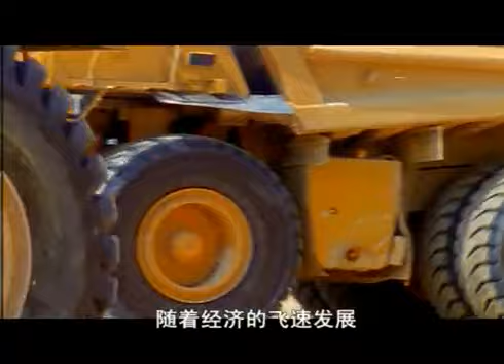With a booming economy, China has an unprecedented number of construction projects on the go. With this Olympic makeover, Chinese authorities plan even more: a new national theater, the Egg; a new stadium, the Bird's Nest; and a giant Olympic swimming pool, the Water Cube.

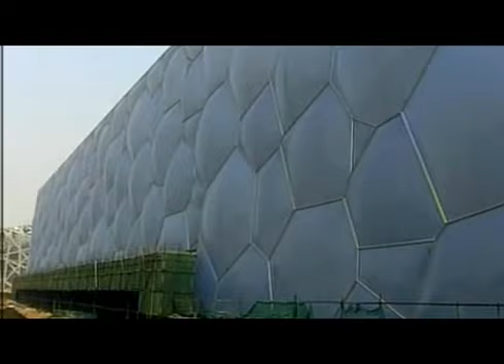They're using these buildings of such enormous size and such groundbreaking technology to show that they are one of the leaders in the world. With passenger numbers set to soar to a whopping 60 million a year by 2015...

Beijing's aging airport will struggle to cope. There is only one solution: they must build the world's biggest airport terminal. Nothing on this scale has ever been undertaken in the history of our species. It's the biggest thing on the planet.

Today, Beijing's new Terminal 3 is fast approaching completion. In under 4 years, they're close to achieving the unthinkable.

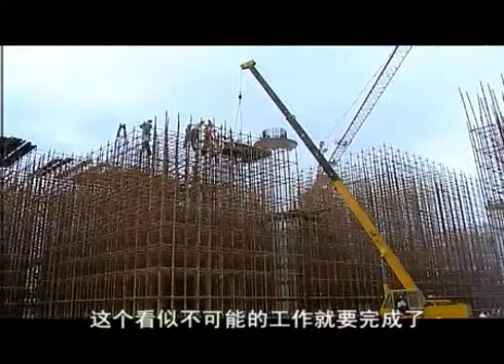The Chinese call it the Dragon. Its astonishing roof mimics the scales of the beast, and is so large you can't see from one end to the other. With giant walls of glass, it has the longest cantilever entrance in the world. And in the belly of the Dragon, one of the largest baggage systems ever built.

But Terminal 3 captures the glory of China's past as well as its future. The roof of gold and red evokes the colors of ancient Chinese palaces. It's a connection to China's past that's important to the architects. The reds, the very intense red, the very Chinese red, the gradations through to gold, the patterns, the shape of the building from above - they're all very evocative of the place.

Throughout history, China has been at the forefront of human endeavor. In ancient times, emperors built gigantic palaces, like the Forbidden City, and engineering wonders, like the Great Wall. These structures pushed the technology of the day to the limit. But a new age is dawning on China as they create a high-tech 21st century metropolis.

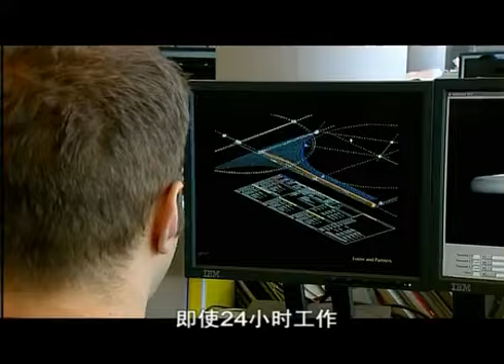Even with commitment like this, there's no guarantee they'll be able to meet the Olympic deadline. You can commit 100%, but in any building venture, there are so many things that can happen during the life of that construction period. You can have storms, tempests, earthquakes.

Foster is right to be concerned by earthquakes. Terminal 3 lies within a major seismic region. Throughout history, quakes have struck this area, causing destruction. Earthquake expert Professor Ke knows the risks they face: it lies in a seismic intensity 8 zone. It's very strong, so earthquake-resistant construction is essential in our buildings. In the past, they were not fully equipped to deal with mega earthquakes, with disastrous consequences.

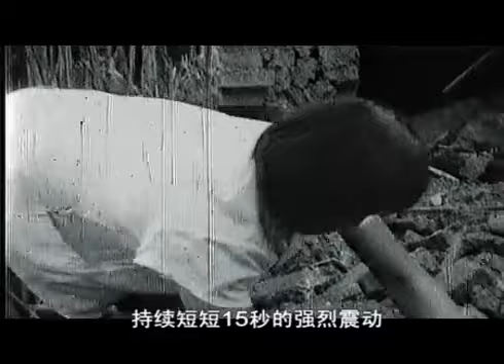Tangshan, July 28, 1976. A quake strikes the city, registering a staggering 7.8 on the Richter scale. Lasting just 15 seconds, this quake levels most of the densely populated city, killing hundreds of thousands of people.

The Tangshan earthquake in 1976 was an important wake-up call to structural engineers and earthquake researchers across the country. In the months ahead, engineers must convince the authorities that this enormous structure can be made quake-proof.

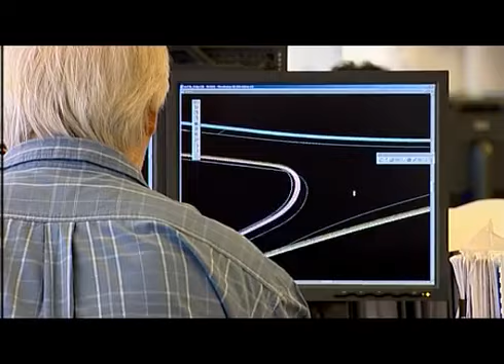Terminal 3 will be an incredible 60% bigger than Hong Kong's Chek Lap Kok, yet they'll have 2 years less construction time. And giant construction projects can lead to giant problems. Building the foundations to this immense structure will be an almighty challenge. Nobody knows whether it can be done, but national pride and Olympic glory is at stake.

Foster and Partners have won the opportunity to build the biggest airport terminal in the world. Architect Mouzhan Majidi knows it's an awesome undertaking. This is perhaps one of the biggest projects any architect has ever taken on board.

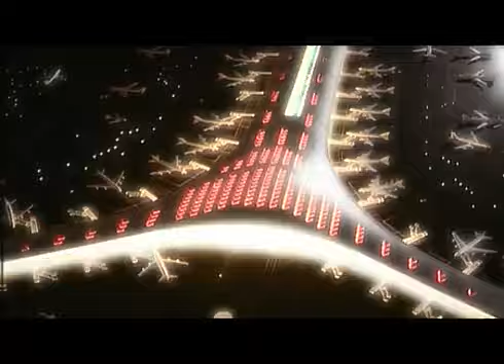Terminal 3 must hold a staggering 150 aircraft at any one time, 120 more than Beijing's existing 2 airport terminals combined. The scale here is colossal. This is the biggest building on the planet. It's a startling design, but an immense challenge to turn it into a reality.

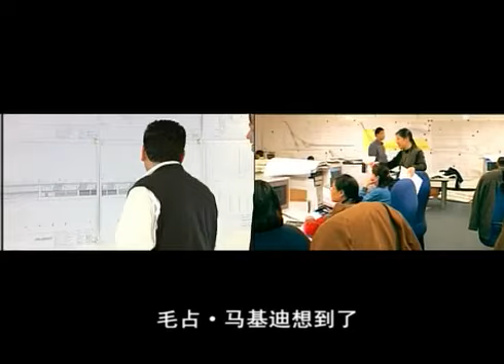They'll need the best engineers they can find. Mouzhan Majidi turns to long-standing construction partners, Arup. Martin Manning is assigned as their project engineer. He's got overall responsibility for drawing up a construction plan.

In the early stages, there was a great deal of panic because of the program. But as the team got going, there was just generalized hysteria about the amount of work that had to be done.

Manning meets with the Chinese clients to present his schedule. He hopes to start the build in September 2004. The Olympic Games open in only 4 years, and time will be tight.

But then their Chinese bosses announce they want to start construction 6 months earlier. Manning is staggered. When it became absolutely obvious that the deadline was not going to move, your mind gets concentrated pretty clearly about the decisions that you have to take.

Manning's right-hand man, Joe Sumners, has no idea how they'll get the work done on time. But then the phone started to ring, and these renowned engineers from around the organisation were sort of picking up the phone and saying, 'I hear you've got a project, it's an impossible delivery time, the engineering's ridiculous, you're bound to fail, can I join you?'

Construction must start in March 2004, so Sumners and Manning hope to find the site ready and prepared for construction crews to move in. They're in for a big surprise.

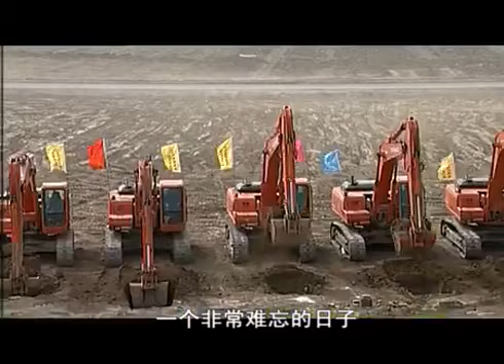They've reached the first major milestone, but a long road still lies ahead. A workforce of 50,000 springs into action. It was like a scene out of movies. It was like building the pyramids, you know, an incredible sight.

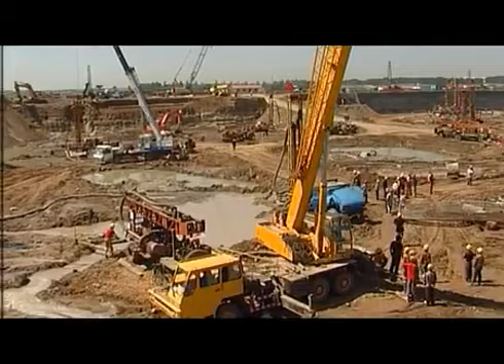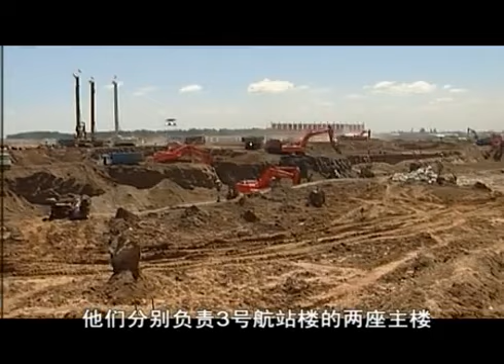Now the construction plans are drawn up, they'll hand over to Chinese firms for the actual build. T3 is so large that it'll take 2 of China's largest construction firms to do the job. They'll each build one of T3's massive concourses, T3A and T3B.

Mr. Bai leads the army of workers at the north side of the site and will take on the enormous responsibility of the construction of T3B. 'Anything that goes wrong will make us Beijing people, our construction workers, even we Chinese, lose faith. So I do feel a great sense of responsibility.'

At the other end of Terminal 3, Mr. Zhang is in charge of T3A. 'It is almost unimaginable to complete a project of this scale within 4 years. However, the task is right here in front of you. There's no way through except to do it well.'

By April 2004, over 100 excavators arrive on site.

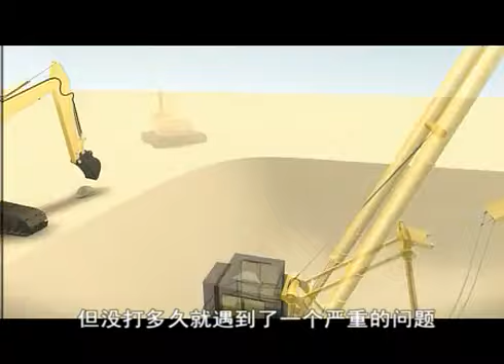217 pile drivers start knocking 20,000 steel piles into the ground. But they've not drilled far before they encounter a serious problem: the water table here is close to the surface, and it can rise even further with heavy rains. The teams need specialist expert advice. One man should be able to help.

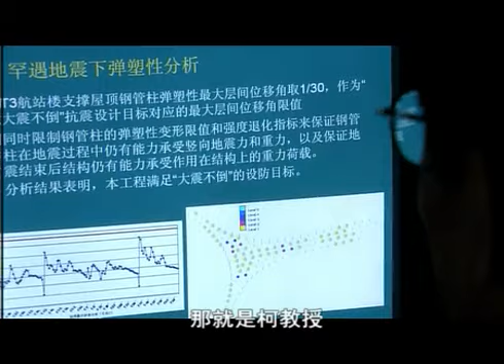Professor Ke is an expert on the ground conditions in Beijing. There are two kinds of piles: one is a pressure-resistant pile, and the other is an uplift pile to prevent the structure from floating due to the high level of underground water. We cannot let the building go afloat when the waters rise.

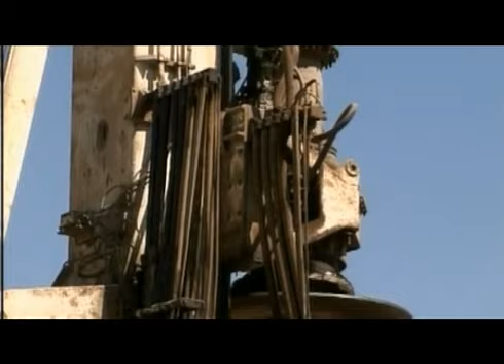The piles also help protect the building from the risk of earthquake damage. When an earthquake wave strikes, it takes some time to travel from the south side to the north side of the building, so we adopted a different design from conventional buildings. Professor Ke's first concern is to ensure that the joints of these long buildings can stand up to one of nature's deadliest forces. The joints are seen as more important than building components.

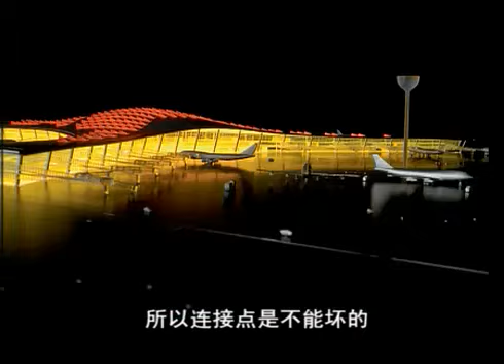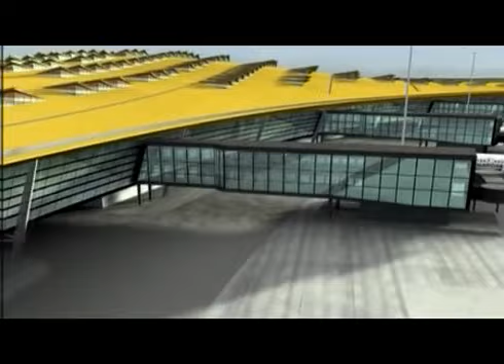Joints must be unbreakable. Ke knows the joints will come under the greatest strain in the corners of the building if an earthquake strikes. The corner of the building is affected the most by earthquake waves. This will cause torsion of the building. Torsion or twisting forces can pose a big challenge to engineers.

November 7th, 1940, and the Tacoma Narrows Bridge in the United States starts twisting in the wind. Within minutes, the bridge shakes itself to bits.

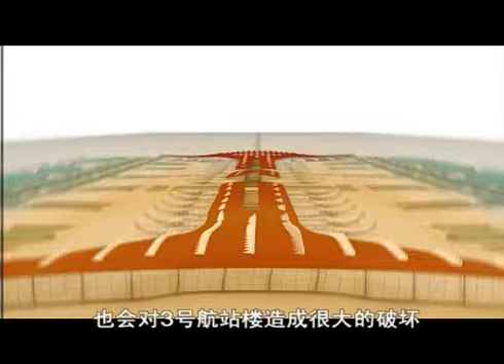No human life was lost in this disaster, but similar torsion forces could impact T3 in a quake scenario. If the two ends of the building vibrate in opposite directions, the building could collapse, and the death toll could be enormous. T3 will need over 1,000 special joints, absorbing the impact should the roof and walls contort. But this will not be enough.

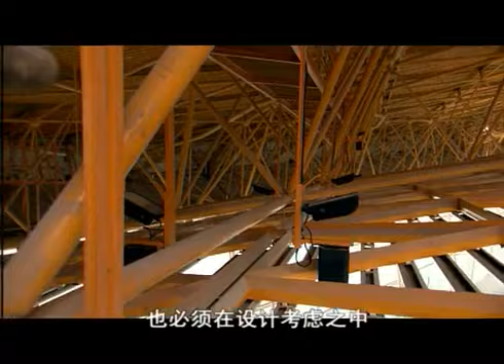Martin Manning knows the steel beams, or members, must also be designed with safety in mind. What we had to do was to choose the sizes of the members so that they were strong enough to resist the forces that were induced within them. After 4 months, the design is finished. Manning is now confident that this building will stand firm.

Yet earthquakes aren't the only force of nature that T3 must endure. The variation in temperature throughout the year is very great indeed. It gets very hot and it gets very cold, so on an annual cycle, the movements are quite large. When this super terminal heats up and cools down, it will grow and shrink by up to 80 centimeters.

In fact, the movements are large enough to have a serious impact on the roof's supporting columns. The thermal movements of the roof are such that as the roof expands, it would have moved those columns too far, it would have bent the columns. If the roof and columns do bend out of shape, it'll be a major disaster for the engineering team.

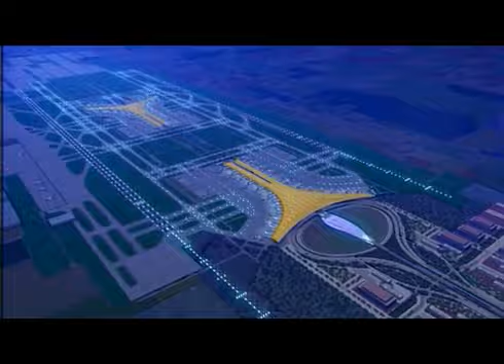Beijing's new airport terminal will have an enormous roof, spanning almost a kilometer at its widest point. Its dragon-like scales will silhouette against the sky, making it instantly recognizable. It's a symbol that's important to Terminal 3 Vice Commander Madame Zhu. When Foster presented the design that symbolized a dragon, we thought it was logical, since China has the culture of the dragon.

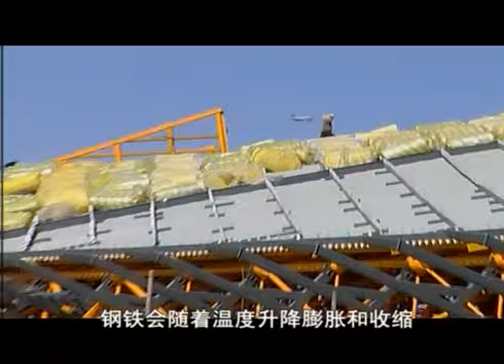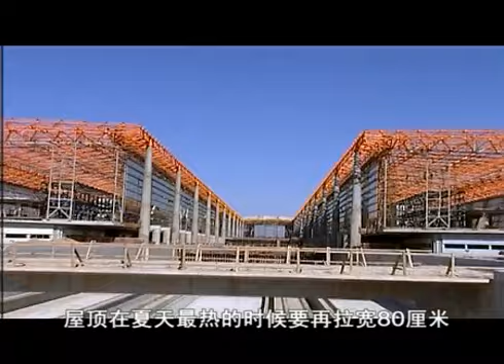It's an awe-inspiring design, but its sheer size could put the structure in serious danger. Steel expands and contracts as it heats up and cools down. In peak summer heat, this roof will grow by up to 80 centimeters at its widest point. Usually, this problem could be solved by building a roof in separate sections. At T3, this is simply not feasible. The roof is a single span and is far too big.

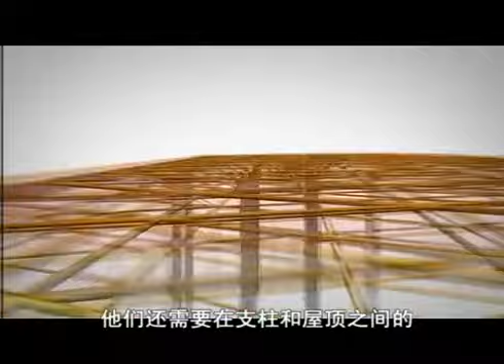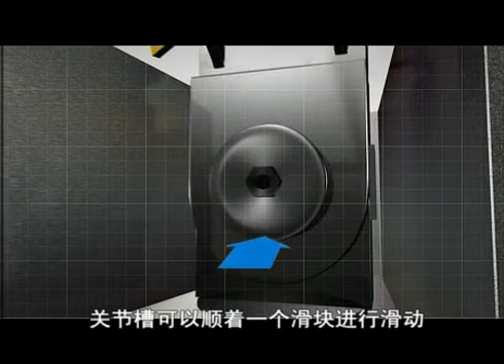Instead, engineers must come up with a clever solution. We adopted many complicated and intricate methods, for instance, loosening and tightening the joints at different spots to relieve or minimize the pressure caused by temperature. But tweaking the regular joints isn't enough. They'll need 32 thermal expansion joints positioned between the columns and the roof at key points. As the steel roof expands, the joint glides along a sliding mechanism. The roof can grow and shrink without causing destruction.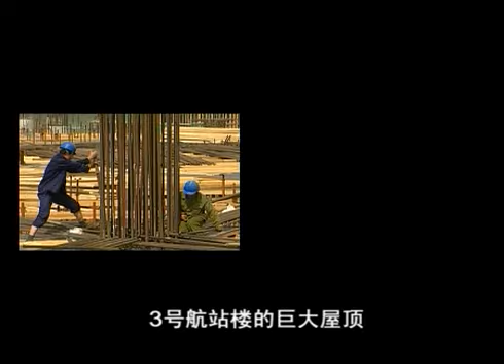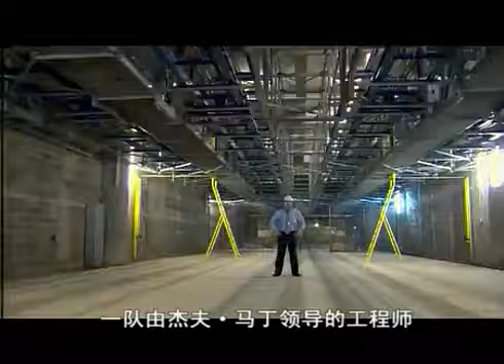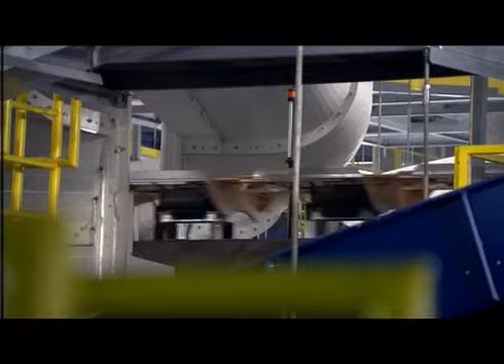Terminal 3's gigantic roof may be safe from buckling in the heat, but it's not long before T3's enormous size causes another headache, this time for the baggage engineers. The system here at Beijing Airport is certainly one of the biggest in the world from a baggage handling system perspective. Baggage system experts fly in from German engineering firm Siemens. Led by engineer Jeff Martin, they begin to plan a $250 million state-of-the-art baggage system. It's expected to handle an awesome 19,200 pieces of luggage per hour. 68 kilometers of conveyor belt will hurtle baggage around the airport.

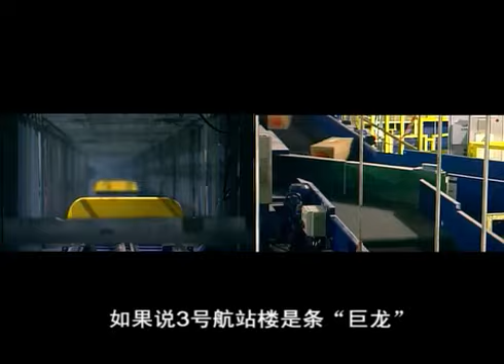If Terminal 3 is to be known as the Dragon, this system will be its lifeblood. The baggage handling system is the veins and arteries of the Dragon. Getting this giant system to fit inside the terminal's basement is like completing a giant jigsaw puzzle.

There doesn't seem to be enough room within Foster's design for such a big system. It causes tension between architects and engineers. At some stage, the whole team has to decide whether they're designing a system to distribute bags or whether they're designing an airport terminal.

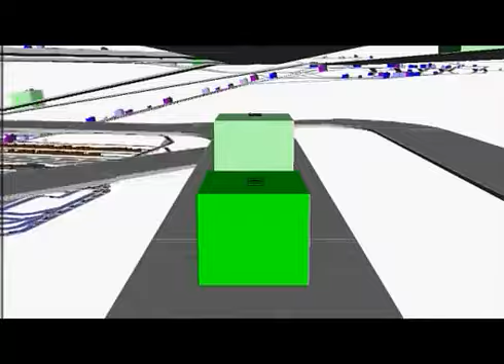Then Jeff Martin and his team hit upon a double-decker system, doubling overall capacity at a stroke. But this will create a new problem. They need more ceiling space.

The original Foster design was designed for a standard airport baggage system. And with the new designs and the new technology required, we had to drop the basement approximately an additional 5 meters. It will cost not just money, but time. And they must still meet the tight deadline.

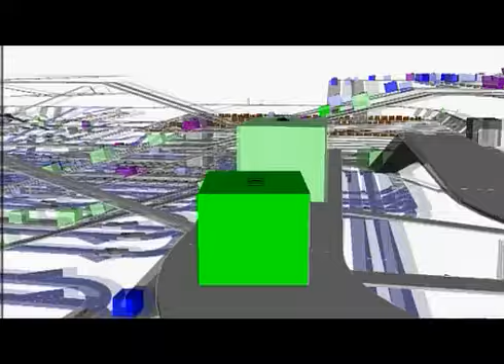Normally a project this size is anywhere from 3 to 4 years in duration. Unfortunately, because of the Olympics, we didn't have that amount of time. We basically had 2.5 years.

The only way to deliver on schedule will be to begin construction of the baggage system whilst the terminal is still underway. As Jeff Martin leads construction, system design changes are still filtering down.

We didn't have time to do it twice. We had time to do it once, and time to do it right the one time. The person doing the design change is sitting at the computer doing the change. Oh, that's easy, no problem. But realistically, when you actually have to install that into the system, there's a lot of things that can go wrong with that design change.

Jeff and his engineers must rise to the challenge. Despite the painful last-minute design changes, they somehow remain on schedule.

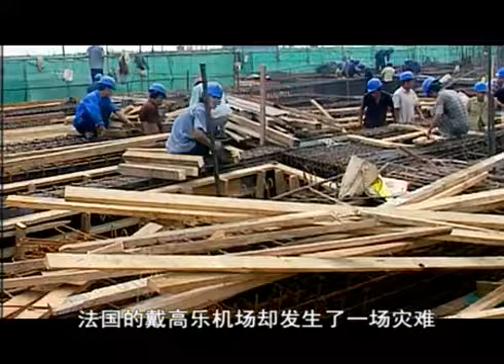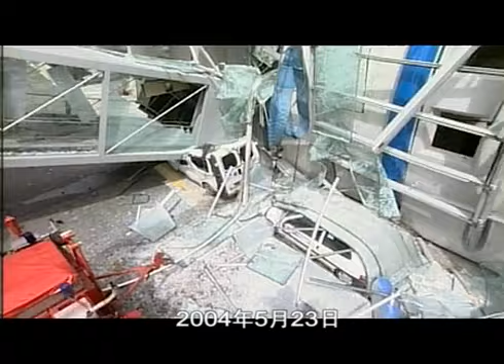The terminal buildings are rising fast out of the ground when disaster strikes at Charles de Gaulle Airport in Paris, France. May 23rd, 2004, a section of the steel and glass roof suddenly crashes to the ground. 4 people are killed, including 2 Chinese.

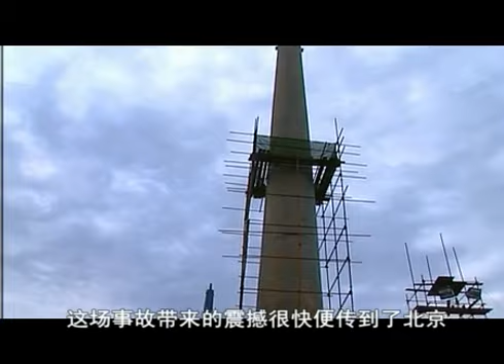The disaster shockwaves are soon felt in Beijing. At that time, there was a lot of construction going on in Beijing, and we paid a lot of attention to the accident. For architects and engineers around the globe, the Paris disaster is a reminder of the importance of safety.

The cause of the collapse is thoroughly investigated, but in Beijing, nothing is underestimated. We were very cautious about the structural engineering and dare not take anything at all for granted. With so many construction projects underway in Beijing, the Chinese know they must keep a close eye on design and construction methods.

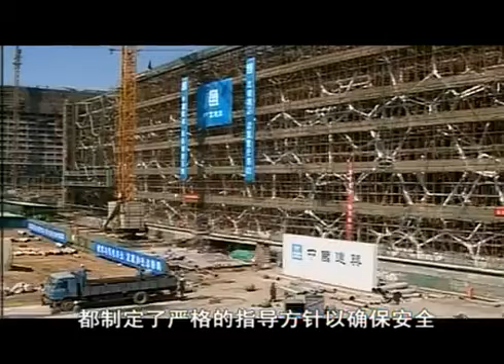The government ensures strict guidelines are applied to all projects to ensure safety. The Chinese architects at T3 have worked hard to safeguard the highest standards. As the Chinese partners in the project, we have always paid close attention to the safety issue. We have every reason to believe the design is safe.

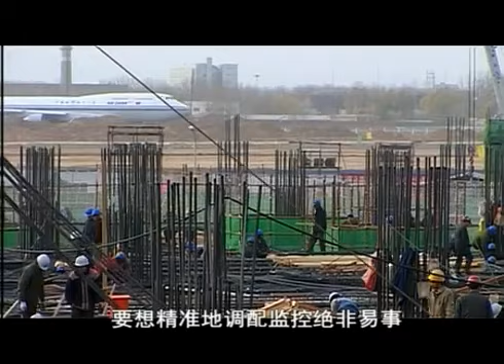With 50,000 workers on site, accurately monitoring the work will be no mean feat. Meanwhile, Beijing's roads are on the brink of gridlock. They must build new highways, subways and rail links, or face transportation meltdown.

No one wants a repeat of what happened in Athens before the 2004 Olympic Games. With only months to go, Greek authorities had not completed their transport network. They narrowly escaped an Olympic fiasco. But T3 will not suffer this fate.

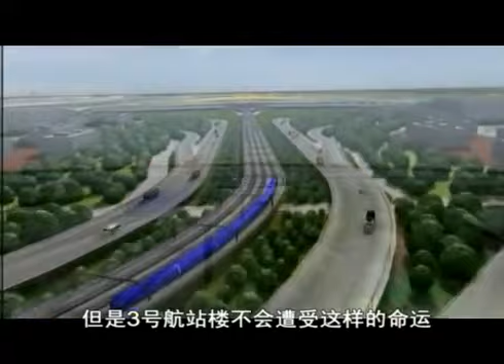Workers build a giant glass train station and lay train tracks to shuttle millions of passengers to Beijing. Engineers must now ensure the tracks will cope with the load.

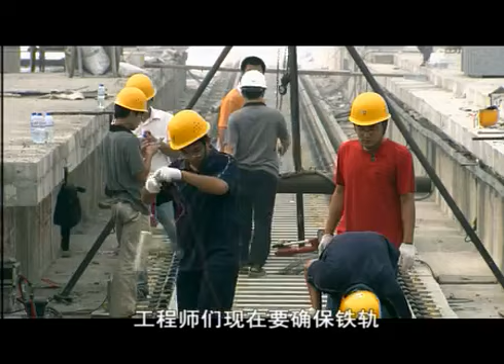What we have to do now is test the construction. We simulate a train in a heavy load situation.

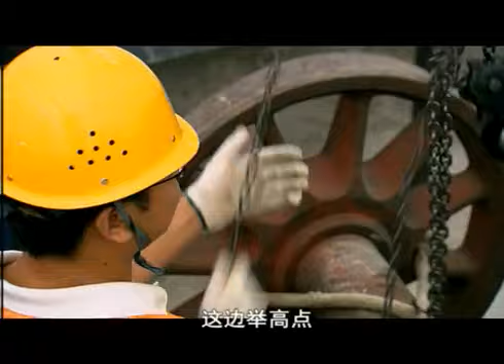Done! One more! Lift this side higher! Done! Are you ready yet? Ready! Cut! Done!

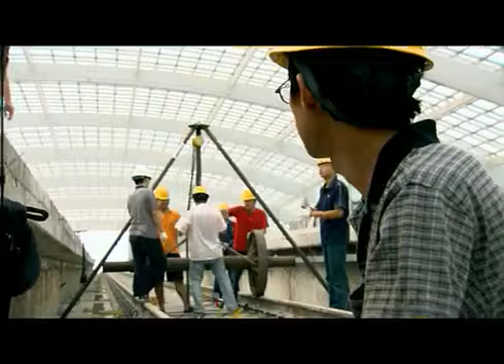The test is successful, but engineers will have to inspect miles of track before the first Olympic visitors arrive.

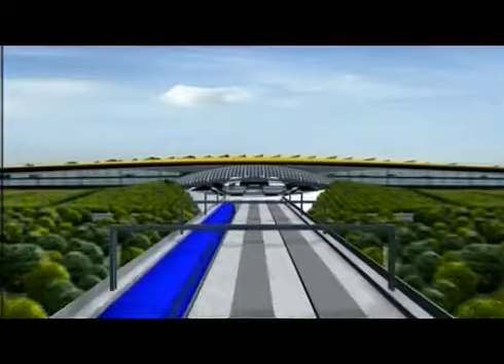All passengers arriving at T3 by train will be greeted by Foster's iconic entrance, a giant 800-meter-long overhanging roof. Mr. Zhang's team at Terminal 3A is ready to start welding this structure, but just as work gets underway, engineers realize they're in big trouble.

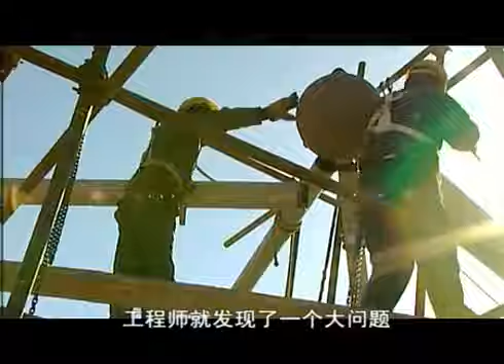It's an unforeseen problem. The overhang is just too big. It'll stop light from getting into the terminal. Engineers must find a solution, but this will take time. With the Olympics fast approaching, it's time they don't have to spare.

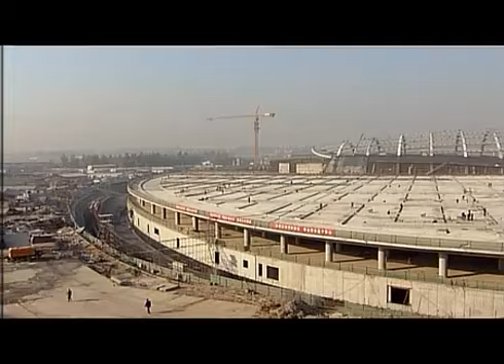October 2005, and Beijing's new Terminal 3 is well underway. Mr. Zhang's construction team is about to start work on the main entrance to Terminal 3A on the south side of the site.

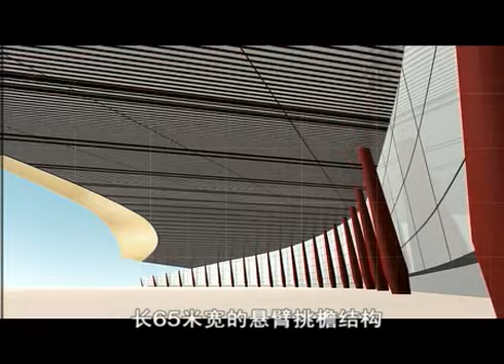Lord Foster has designed a signature piece, an 800-meter-long, 65-meter-wide cantilevered overhang. This sweeping curve is a key architectural statement. But there's bad news.

We ran into a problem in the middle of construction. The original width of the overhanging roof was too large and would cause insufficient indoor light. It's an unforeseen problem. Engineers could increase the number of skylights to compensate, but this solution could wreck Foster's iconic design.

They will have to shrink the overhang. It's cut back from an awe-inspiring 65 meters down to just 35. The entrance will be less dramatic, but it's the only way to ensure Foster's super terminal is flooded with light.

Lord Foster also created an extraordinary roof design. The concept looked stunning, but Chinese engineers have never built a roof like it.

Engineer Mr. Zhai is daunted by its complexity. We have never come across something this big. We have never done anything like this before. The many curves also made our construction difficult.

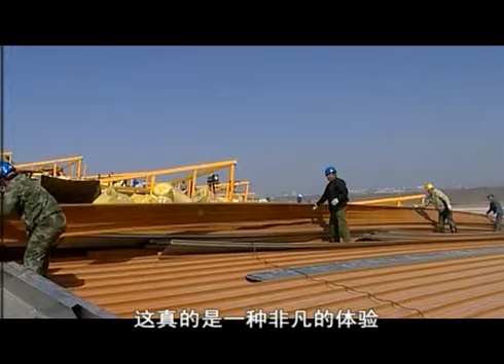With each skylight now located, the iconic dragon roof begins to take shape. And that was a phenomenal kind of experience, actually seeing the roof structure being sort of stitched together throughout the footprint of the building. They install 300,000 square meters of roofing panels in just 4 months.

With the roof near completion, Terminal 3 is a step closer to the impending deadline.

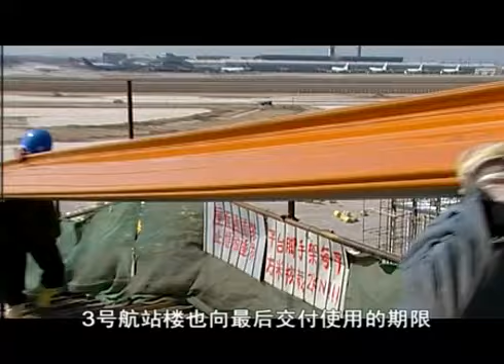The 2008 Olympic Games will bring a surge of visitors. To cope, Beijing must undergo one of the biggest transformations in its history. Terminal 3's completion on time is central to the city's ambitions.

The project has a really short construction period. We have to put it into use by the 2008 Olympics and make sure it serves the Olympics smoothly, which puts great pressure on us.

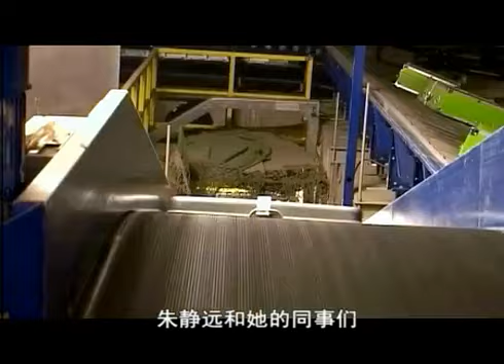As the Olympic clock counts down, her team must think about airport safety. For the terrorists, Terminal 3 could provide an attractive target. The baggage system must be made terrorist-proof. Yet with the volume of luggage going through this terminal every day, an estimated 250,000 bags, it's a tall order. The world knows what just one rogue suitcase can do.

In 1988, Pan Am Flight 103 took off from London Heathrow, heading for New York. Less than an hour into the flight, the plane exploded in mid-air over the village of Lockerbie, Scotland. People and debris rained down from the sky. In all, 270 people were killed.

It's a security expert's worst nightmare. No one wants another Lockerbie on their hands. Certainly, Lockerbie does enter into your thoughts relative to your baggage, to making sure your baggage is secure, that it is safe, that you don't have contraband, explosives, anything that's not supposed to be in there.

The chance of a bag containing a bomb is less than 1 in a billion. But passengers want to know they are totally safe.

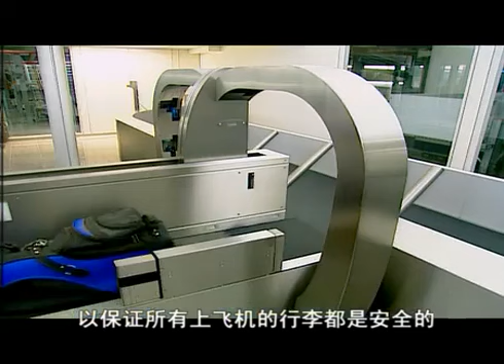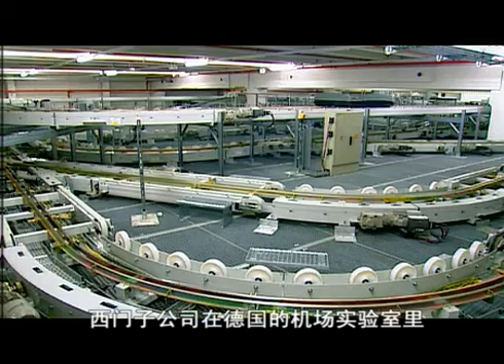It's one of the world's most advanced X-ray systems. Developed in Germany in their airport laboratory, Siemens have created the ultimate security machine. State-of-the-art scanners will examine 600 bags per minute. Powerful computers search for traces of explosives at lightning speed.

Jeff and his team have minimized the potential bomb threat, but now have an everyday problem to contend with: how to transport bags between terminals 3A and 3B, a distance of over 2 kilometers. A conventional conveyor system wouldn't work, so it required new technology, an updated, higher speed conveyor system.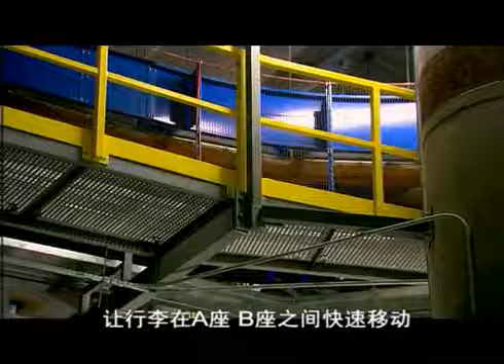In place of a conventional conveyor, they install a 4-stage high-speed belt to whisk bags from T3A to T3B. Luggage is accelerated to 40 kilometers per hour in just 5 seconds.

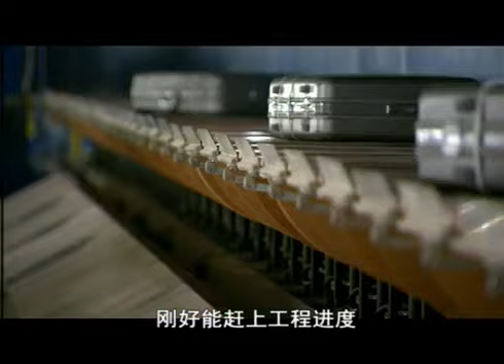With all the luggage system problems now ironed out, the project is still on schedule. Just. Today, Jeff and his team are testing the system in order to see if it will cope with the intense workload.

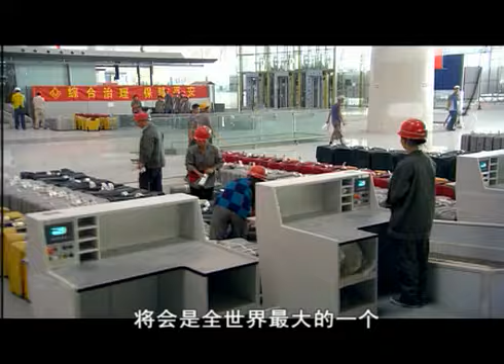The test will begin at T3A's check-in desks. Right, we're nearly ready to go. When this airport's finished, it will be the biggest in the world. This can do something like 20,000 bags an hour. Might as well start on them now.

In the control room, they track the progress of the baggage around the airport. I just need to know how many bags we have already let through. It's the same problem we had yesterday, the CTB04 and the check trigger signal. I would talk to Jackie to check that out.

We're almost done, but we're also facing some problems now with the manual encoding in T3B. Coming through the tunnel, yes, having some stuck bags there. We can have a look later to the screens. All right.

They're testing their machinery to avoid the worst-case scenario, a system-wide failure. The prospect of any such breakdown affecting Olympic guests would be unthinkable. If the system fails during the Olympics, it'll be not only a disaster for Siemens, it'll be a disaster for the Chinese government. It'll be an embarrassment seen by the eyes of the world.

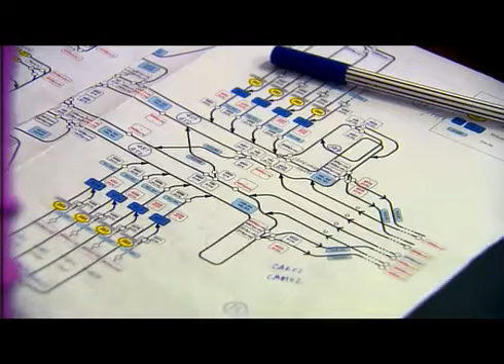So out of the 5,000 bags for today's test, how many are through the system already? 4,500. So we're almost done with the test then? Yes. All right, the rest of the system looks like it's operating pretty well today then. I'm pretty happy with this. Yes. All right, thank you. You're welcome.

The system has coped with the strain. Jeff is relieved. The hard work is paying off. In my mind, this system, the baggage handling system, is more of an engineering marvel than the building. And maybe I'm biased, but this is certainly one of the most sophisticated baggage handling systems in the world.

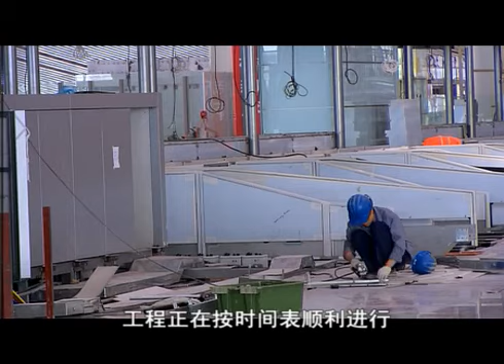The project is all running to schedule when new aviation data comes through. Passenger numbers have rocketed beyond even the wildest estimates. Beijing's existing airport terminals were designed to serve 35 million passengers a year, but already serve a staggering 48 million. 24 months into the build, airport authorities suddenly realize they need an entirely new building, Terminal 3C.

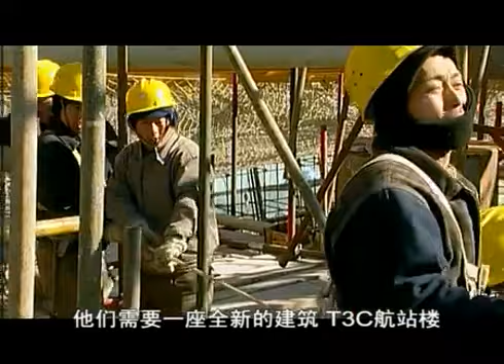The world's biggest airport terminal will not be big enough. They had planned to construct T3C in 2010, but that would be too late. They must start the construction now. It's a major strain on the schedule, but Madame Xu is determined to forge ahead.

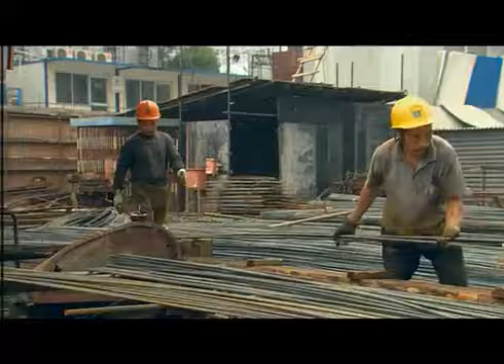T3C is in the middle of T3A and T3B. If we needed further expansion in the future, the construction could cause conflict with airport operations. This is no minor addition to the infrastructure. The requirement is for a building of over 80,000 square meters. It'll take 20,000 tons of steel and 80,000 cubic meters of concrete. It'll be a massive job, but the deadline can't be changed. Terminal 3C must be ready for the Olympics.

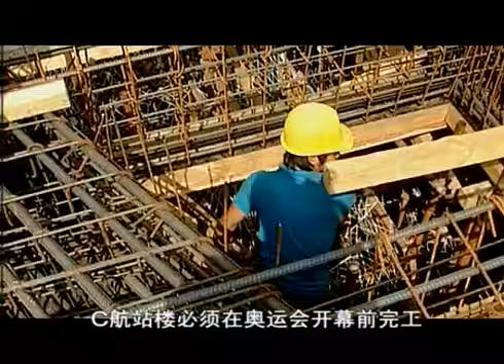Beijing's Terminal 3 is on track to meet the Olympic deadline when an unexpected challenge arises for Madame Chu. With passenger numbers going through the roof, this super terminal now needs an entirely new building, Terminal 3C. They have only 23 months to make it happen. The construction of T3C will at first be mainly to serve the Olympic teams.

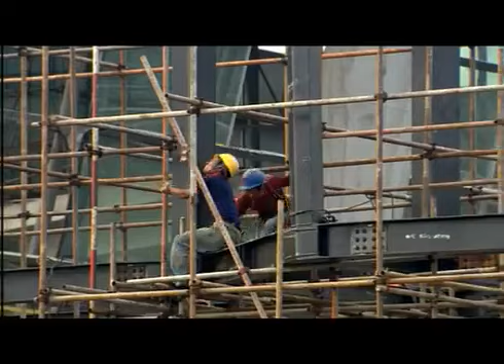We anticipate that about 80% of them will come in as groups, so we will let them go straight through T3C. T3C can now transport Olympic teams to the Games. But as T3 races to the finish, the whole of Beijing is under pressure to be ready on time.

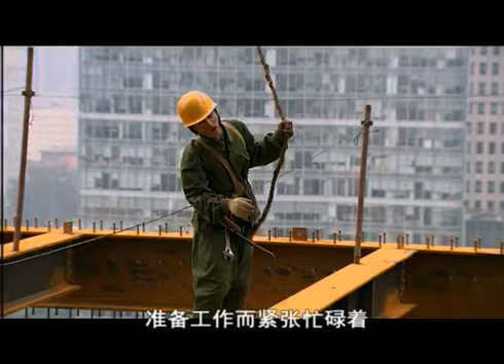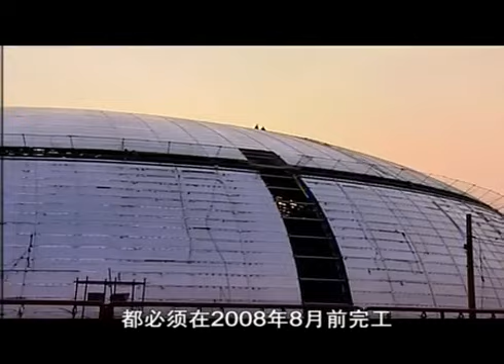A citywide makeover is in its final stages for the Beijing Olympic Games. Every construction project must be completed by August 2008. Terminal 3 will be the gateway to this 21st century metropolis, the biggest airport terminal ever built. As the gateway to not only the Games, but to the whole of China, it's essential T3 is up and running.

On the 30th of April 2006, the roof and structure are finished. It's a moment for celebration.

Madame Chu is rightfully proud of the work they've done. I felt almost like it was my own child. From the very beginning, I could only keep trying. Now that it's almost complete, it's like my child is turning into an adult, and it's time for him to make his contribution to society.

175 escalators and 437 travelators help speed passengers through this colossal building. 445 elevators must be installed to connect this 7-story terminal. For the engineers, it's the culmination of 4 years of toil.

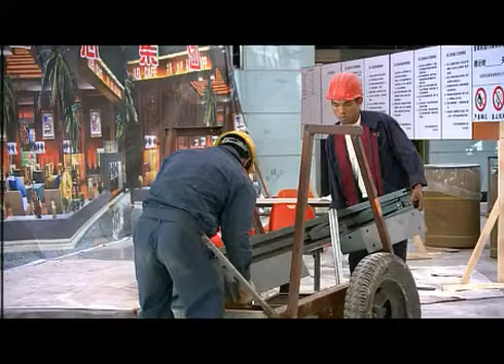Every cubic meter of the cement used for the construction of Terminal 3, every steel pile, they have our sweat on them. But will their efforts be enough to make this the greatest airport in the world?

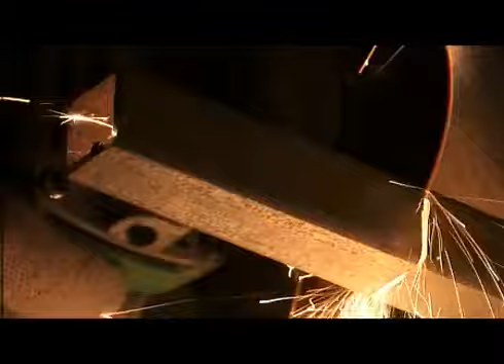The interior aims to be every bit as impressive. The structure now stands tall. Glass walls gleaming as far as the eye can see. It's a distinctively Chinese triumph. The use of the colors, the temple-like marching of the red columns, it's very much about Beijing, and you wouldn't expect to see a terminal like this anywhere else. The vast steel roof curves like a sleeping dragon against the Beijing skyline. Its triangular lighting vents beam daylight throughout the building.

As soon as you step through the front door, you're presented with this huge, vast space, probably the biggest enclosed public space in the world. You know, it just takes your breath away.

Not only in construction, but also in terms of economic development, China is right at its peak. T3 marks the rise of this modern economic giant, propelling itself into the 21st century. A man-made marvel, an iconic gateway to China that all of her people can be proud of.